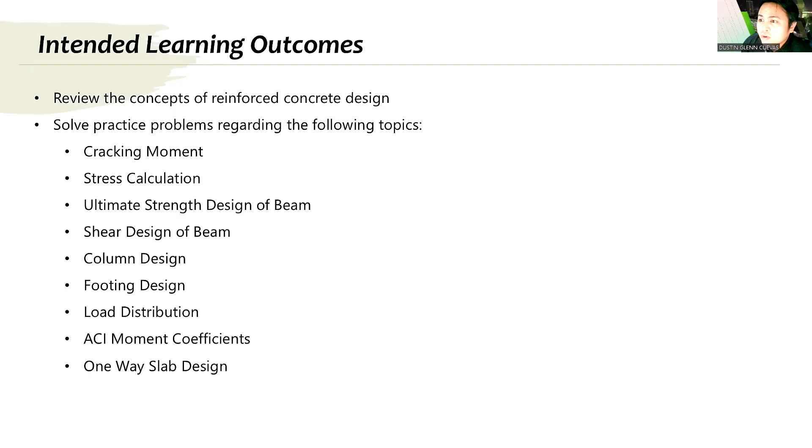Let's start. Our intended learning outcome for today's lecture is to review the concept of reinforced concrete design. For those of you under me in RCD, I actually revised the lecture—this is not my original lecture, this is my review lecture. I'll be a bit faster here, and mostly I'm just focusing on the calculation, not on the concept. I won't be discussing the concept in much detail, unlike in the original RCD lecture.

We are going to solve practice problems on the following topics: cracking moment, stress calculation, then we'll jump directly into Ultimate Strength Design (USD), shear design, column design, footing design. I will also cover load distribution, one-way and two-way. Then we're going to discuss the ACI moment coefficient, where we calculate moments for a continuous girder or continuous slab given the position of the live load—we'll talk about where these coefficients come from. We'll also discuss one-way slab design. I'm not going to discuss two-way slab because that's not usually given in the board exam—it's not commonly given. These are the common topics.

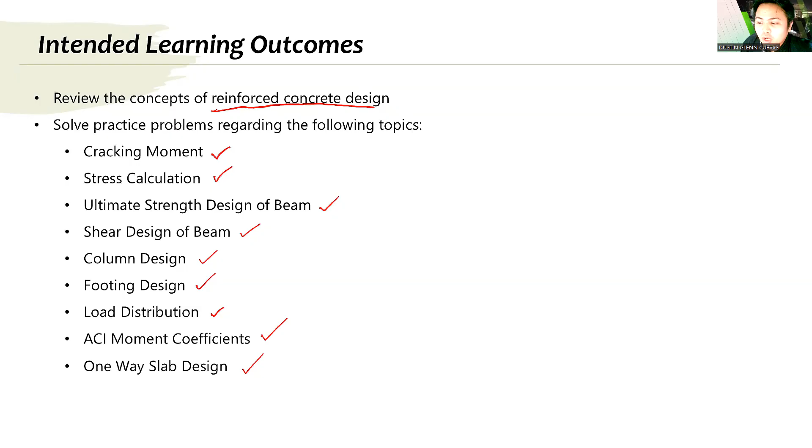Okay, let's start with a simply supported beam. If you have a simply supported beam loaded with a uniform load W, the beam will deflect downward. As you learned in other courses, we know that tension is at the bottom and compression is at the top. That's why we put reinforcement there—our concrete is weak in tension.

We add reinforcement to resist the tension. So when you have a simply supported beam, compression is at the top and tension is at the bottom. Where do we place the reinforcement? At the tension side—we only provide reinforcement at the tension side, because concrete is weak in tension.

There are stages that a beam goes through when we load it with a uniform load. The first is the uncracked stage, where since you haven't loaded it that much yet, the stress distribution is linear. At this point, if your stress in concrete is less than the cracking stress, or the modulus of rupture—this is what we call the cracking stress, or basically the modulus of rupture.

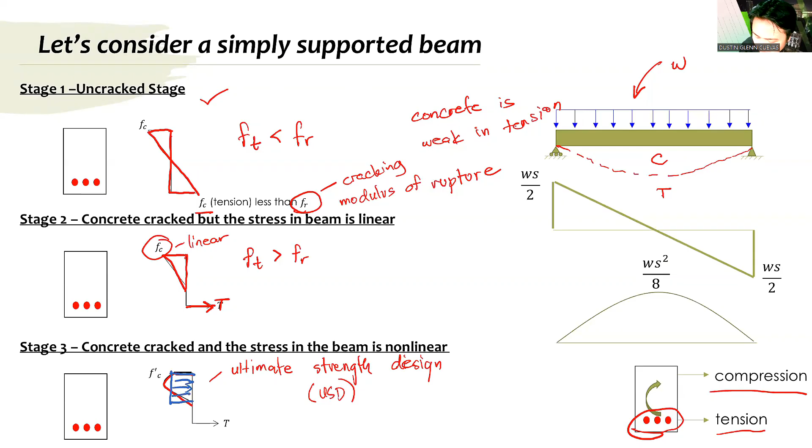What we are doing in USD is we are transforming this nonlinear curve into an equivalent stress block, called Whitney's stress block. And based on this, according to what we learned in RCD, the maximum stress that we consider in this uniform stress block is 0.85 of FC prime, because we are averaging the nonlinear stress distribution. Okay, that is for ultimate strength design.

So first, let's talk about the uncracked stage. In an uncracked stage, we're just going to use a simple formula from strength of materials, that the bending stress is equal to MC over I, or basically in this case, MY over I.

And our modulus of rupture, basically this is the stress before the concrete cracks. This is the stress before the concrete cracks. FR is just the stress before the concrete cracks, that's all.

And according to our code, it is actually FR, which is equal to 0.62 lambda square root of FC prime. Lambda is just the multiplier for lightweight concrete, 0.75 for lightweight, 1.0 for normal weight. So commonly, it's just 1.

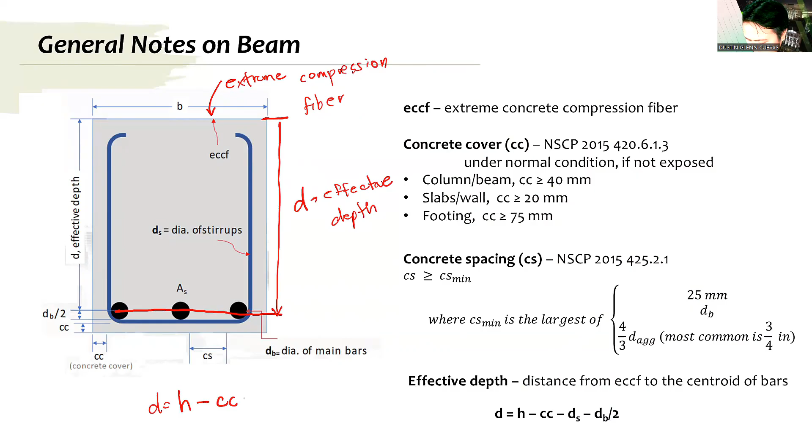So how do we calculate for the effective depth? Basically, the effective depth is just the total height of the beam minus the concrete cover minus the diameter of the stirrups minus the diameter of the bar over 2.

For the concrete cover, according to our NSCP code: for column or beam, the concrete cover should be greater than 40 millimeter. For slab, it should be greater than 20 millimeter. For footing, since footing is exposed in soil, a hazardous surface, the concrete cover should be greater than 75 millimeter.

So the concrete spacing, or the spacing between bars, CS - the clear spacing between bars should be greater than the minimum concrete spacing. The minimum concrete spacing is 25 mm. It's actually the largest of the following: 25 mm, the diameter of the bar, or 4/3 diameter of the aggregates.

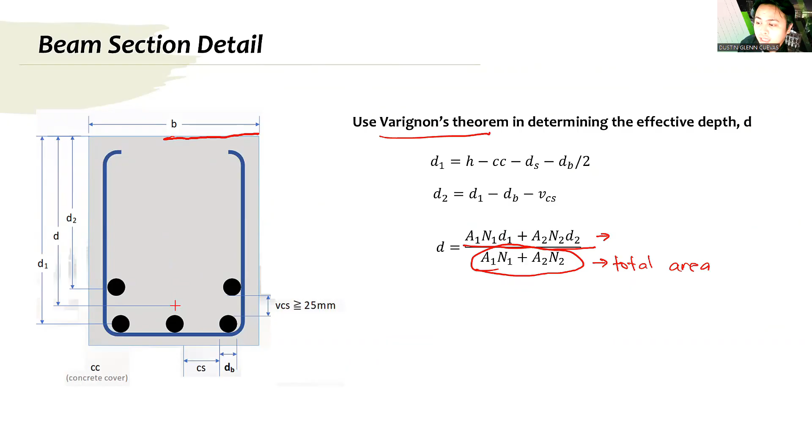Basically, you just take the moment at the top - this is just the total area, and the top part is just the moment of the bars coming from the top. It's just moment, this is just Varignon's theorem.

Okay, so for the principle of working stress design, let's now move on to after the beam cracks - basically when the beam cracks, your tension stress is greater than the modulus of rupture, FR. So when your tension stress is greater than FR, that means the concrete is cracked.

So for the working stress design, you now have a linear stress distribution - concrete is linear, and at the same time, steel is also linear. However, in order to use the formula MC over I to calculate the stress, it is only applicable for a homogeneous element.

So our formula MC over I is only applicable for a homogeneous element. What does homogeneous mean? It means the element is made up of only one material. And since what you are analyzing is now a combination of concrete and steel, MC over I can't be used directly. But we can still use it if we transform the steel into its corresponding concrete area.

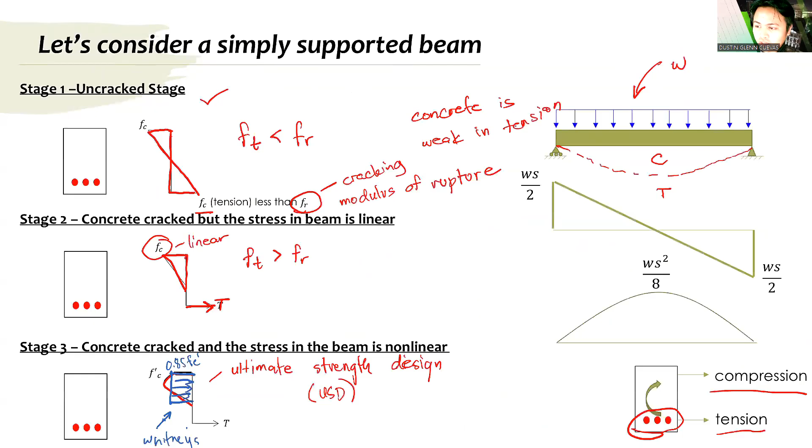Ano po ang allowable stress based on our code? Ang pinag-uusapan pa lang po natin dito ay linear stress distribution under the working stress design, yung sa stage 2. Dito sa concrete, crack but the stress in beam is still linear. Stage 2 pa lang tayo. So what are the maximum elastic stress?

The maximum elastic stress, basically for concrete, is 0.45 of FC prime. For steel, that is around 140 megapascal for grade 280, or for grade 280 bars, and 170 megapascal for grade 420 bars. Or usually ang FS natin, that is just taken as 0.5 of FY.

0.5 of FY. Ano po yung factors na yan? Yung 0.45 saka 0.5, basically those are coming from factor of safety. Kapag working stress design, nagpo-provide tayo ng factor of safety, and that factor of safety is corresponding to 0.45 and 0.5. Binabawasan natin yung maximum stress.

Ang principle ng working stress design ay ginagamit lang natin ang partial ng stress, parang sa steel design. Gumagamit lang tayo ng partial stress. Kaya po minomultiply natin sila ng 0.45 or 0.5 because we are only getting a partial of the stress. We are not maximizing the stress. Ang nagma-maximize ng stress ay ultimate strength design. Again, ang nagma-maximize ng stress ay ultimate strength design.

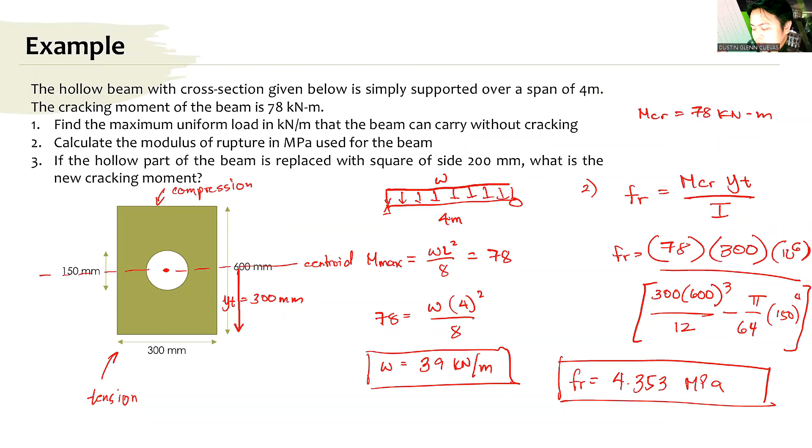Kasi kahit ano pang shape ng concrete, ang FR natin according to NSCP 2015 is just 0.62 lambda square root of FC prime. So basically the modulus of rupture is dependent on the FC prime. So kapag hindi mo binago yung FC prime, hindi magbabago si modulus of rupture.

So to answer number 3, basically what you need to do, let me add nyo. Sabi niya po, papalitan daw natin yung ating beam na meron tayong square sa gitna. But the square is now 200 millimeter. So this is still 600 and this is still 300.

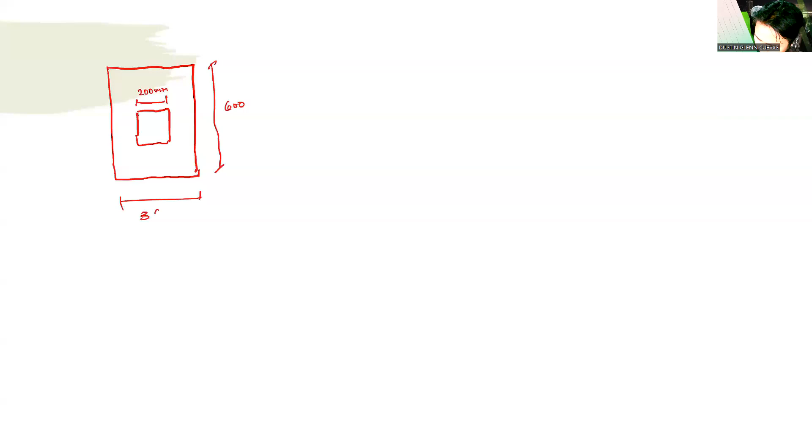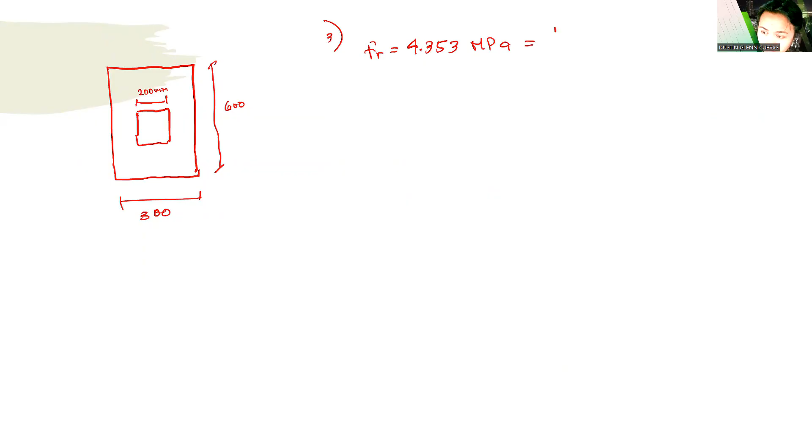So number 3: since hindi mo naman pinalitan yung strength ng concrete, the modulus of rupture will be the same. So FR will still be 4.353 megapascal. FR is 4.353 megapascal, and basically that is equal to MCR YT over I gross.

So 4.353 is equal to the new cracking moment, since we are trying to calculate the new cracking moment, multiplied by 10 raised to 6 para maging Newton millimeter, multiply by YT. Our YT is still 300 mm coming from the centroid going into the extreme tension fiber, 300 millimeter. So that is 300 divided by the gross moment of inertia. That is, it is actually now a square, no? Square na po siya.

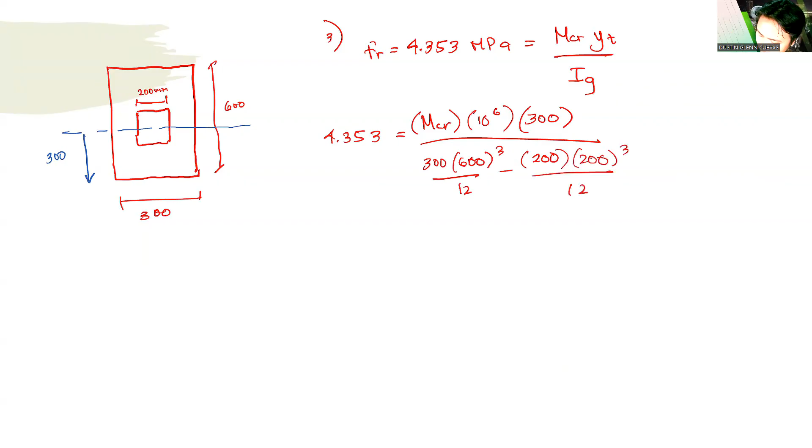So basically base 300 times height cube over 12 minus the square, or basically that is 200 times 200 cube over 12. So ito na po yung ating MCR. Can you calculate for MCR? Just cross multiply, but basically the value of FR will be the same. Parehas lang po yung value ng FR.

So the answer will now be 76.42 kilonewton meter. So coming from 78, it is now 76.42. So far, is that clear? Clear po tayo dito?

Okay, so let's now try to solve this problem. A rectangular beam 300 by 500 reinforced with 3 diameter 28 mm bars, having its centroid 75 mm from the bottom of the beam. Use FC prime 21 megapascal, Fy 275. Calculate the elastic bending stress to sustain dead load moment of 30 and live load of 40 kilonewton meter.

So basically, our beam is this one. Meron po tayong beam dyan. So according to the problem, we have a beam of 300 by 500 mm reinforced with 3 diameter 28 mm bars. And having its centroid 75 mm from the bottom of the beam. So basically, this is 75.

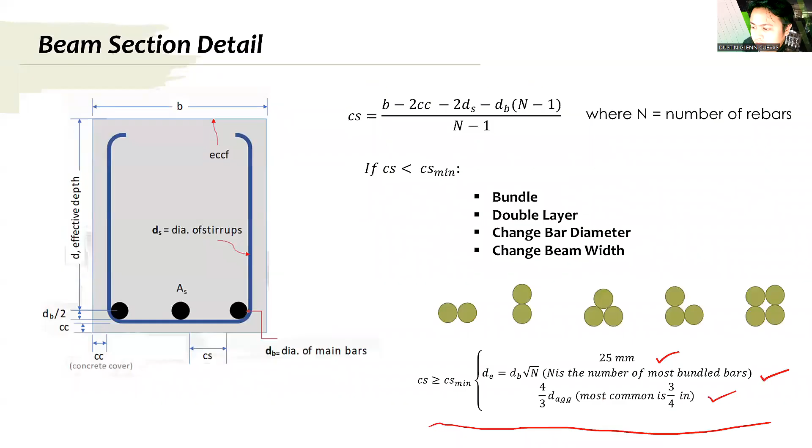So if ayaw nyo mag-assume agad, you can easily calculate for the cracking moment. Pwede naman pong i-calculate yung cracking moment. MCR is just equal to FR IG over YT. So MCR natin, the cracking moment will be equal to, ang FR natin is equal to 0.62, that is a formula given in our code. Usually po, si Ma'am Praxi, the examiner for RCD, kapag FR, hindi niya na binibigay. But lahat naman ng codes binibigay niya when it comes to RCD, pero yung FR, hindi niya na binibigay. Dapat po alam na natin yan. 0.62 square root of FC prime, no?

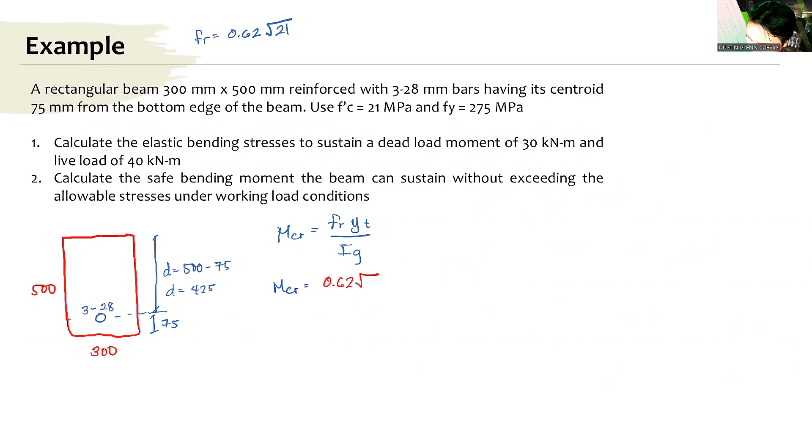So FR is basically 0.62 square root of FC prime. Our FC prime is 21. Can you calculate this FR? Anyway, kahit wala pong value, diretso ko na. So that will be 0.62 square root of FC prime 21 multiplied by YT. YT will be coming from the centroid going to the extreme tension fiber.

Again, hindi mo pa i-consider yung bakal kapag nagka-calculate ka ng cracking moment. Our YT is 250. YT is equal to 250, divided by I gross, that is base times height cube over 12. So what will be our MCR?

Divide it by 10 raised to 6 para maging kilonewton meter. I-divide na lang natin ng 1 over 1,000 squared para maging kilonewton meter. The answer will be? What's the value for cracking moment? .23? Is that correct? Is that correct?

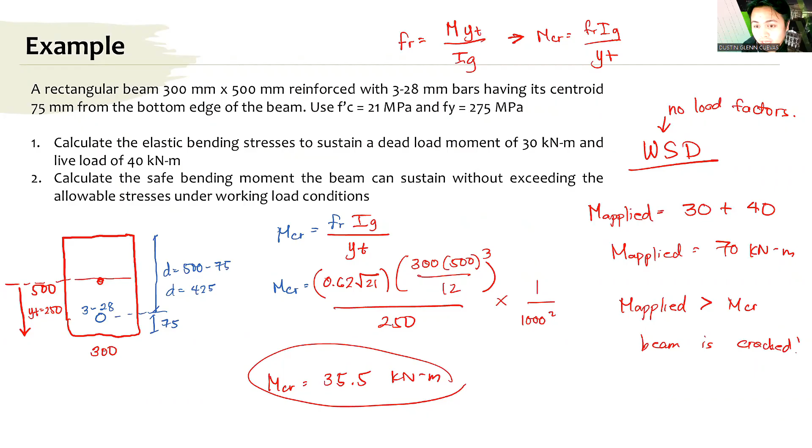Anyway, this step, ito pong ginagawa ko na to, hindi talaga siya part ng calculation. Pinakita ko lang na nag-crack na si beam kapag na-reach niya yung 35.5. Pinakita ko lang na crack na po yung beam. But it's not actually a part of our solution.

So let's go to our solution proper. Basically, ang kailangan niyo lang gawin is if you encounter this type of problem, alam mo na ang pinapakalculate sa'yo is working stress design, linear yung stress. Kasi nga sinabi niya na elastic bending stress, ito na po yung clue mo. So kung pinapakalculate sa'yo yung elastic bending stress, kahit hindi niya sabihin na working stress design ito, alam mo na po na working stress design yung gagamitin mo. Alam mo na hindi mo kailangan mag-apply ng load factors, alam mo na nagagamit ka ng modular ratio because sinabi niya elastic bending stresses. Okay?

So again, you have a beam which is actually 300 by 500, and you have a reinforcement at the bottom. The reinforcement at the bottom is 3 diameter 28. The effective depth is 425.

So since nag-crack na po yung beam natin, magbabago na po yung neutral axis natin or yung centroid. This is now your neutral axis. That is your neutral axis. And anything below the neutral axis is now considered as crack. Lahat po ito considered as cracked. Ibig sabihin po kapag crack, ineffective, hindi na siya kasama sa calculation. So kapag crack na po yung ilalim, when your moment is greater than the cracking moment, ineffective na yung ilalim. We are not going to consider that in our calculation. So we are actually locating a new depth of the neutral axis, which is x.

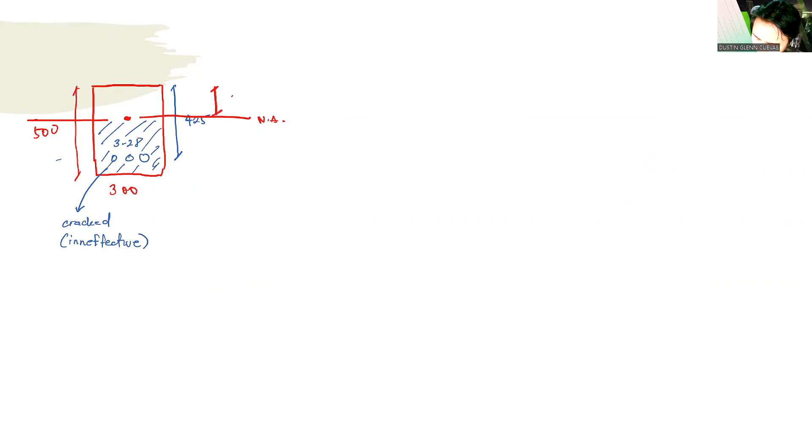Hinahanap mo yung depth ng neutral axis. So to locate the depth of the neutral axis, i-equate po natin yung area. But before we equate the area, para magamit natin yung formula na MC over I,

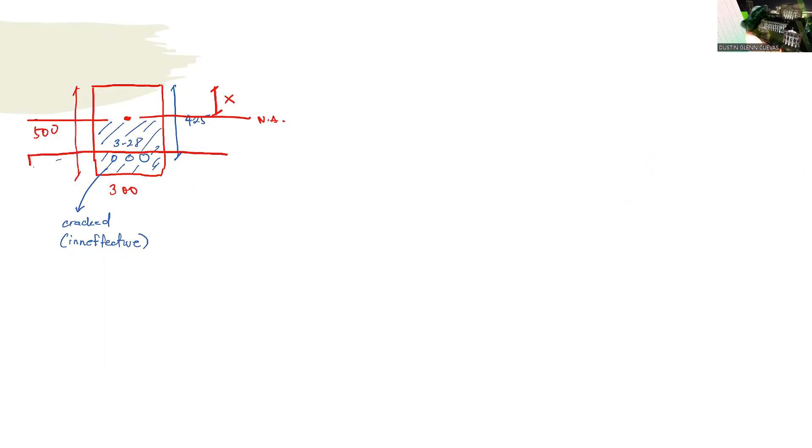kailangan natin i-transform yung bakal into its equivalent concrete area. Ita-transform natin into its equivalent concrete area. So ang gagawin natin, i-multiply natin ang tinatawag na modular ratio. I-multiply natin 'yan, so lalaki yung area ng bakal, and the area of the bars will now be considered as N multiplied by AS. And your N is given as ES over EC,

which is ES is 200,000 megapascal divided by EC, which is 4,700 square root of FC prime. FC prime is 21. So what's the value of 200,000 divided by 4,700 square root of 21? 9.29, and since hindi tayo nagko-consider ng decimal, this is just rounded up or rounded down to 9, nearest whole number 9.

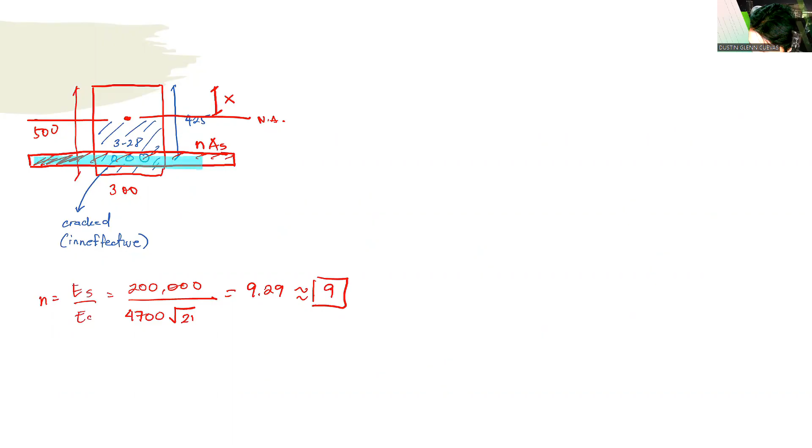So what we are going to do is to transform the area of steel into its equivalent concrete area. So magiging concrete na po ito. So itong kukulayan ko, this one, this will now be concrete. So yung bakal mo naging concrete.

And then in order to locate the neutral axis, we are going to equate the area top. Area top is equal to area bottom. Equate mo lang sa area top equals area bottom. Ang area top is basically the area of the concrete on top, that is 300 multiplied by x.

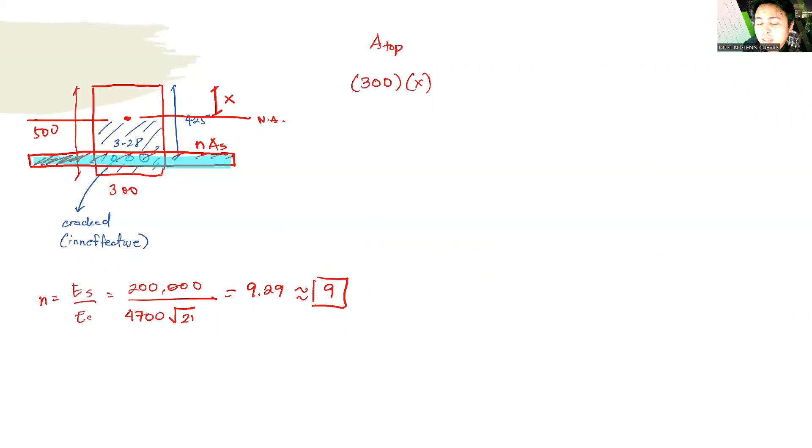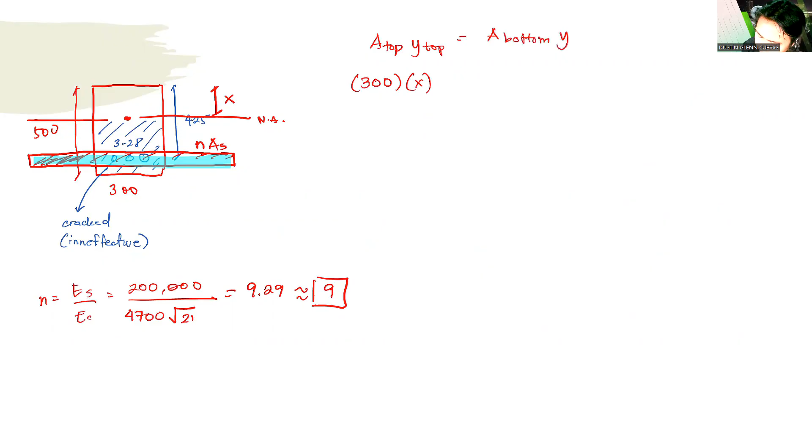Imo-moment natin si area top, imo-moment natin kay neutral axis. So kulang yung sinulat ko, that is supposed to be the area top, imo-moment natin sa neutral axis. Actually ang ginagawa lang po natin Varignon's theorem. So the moment of area at the top, area top multiplied by y bar, y top is equal to area bottom multiplied by y bottom.

Area top multiplied by y top is equal to area bottom multiplied by y bottom. So this is actually the area. Ito na yung area natin ng top, 300 multiplied by x. Kasi nga, 300 lang po ito. So, multiply natin ang distance from the neutral axis. The distance from the neutral axis is x over 2. So, 300 times x, that is the area, multiplied by the distance of the centroid to the neutral axis, that is x over 2.

Next, equals, wala na pong area sa top, yan lang. Area bottom. The area at the bottom is now the transformed area of steel into its equivalent concrete area. So, ang transformed area ng steel is N multiplied by AS multiplied by the distance from the centroid, or the distance from the neutral axis going into the centroid of the bars or the centroid of the transform area is equal to d minus x, or basically 425 minus x. This is d minus x. Kasi ito po effective depth, so that is d minus x multiplied by d minus x.

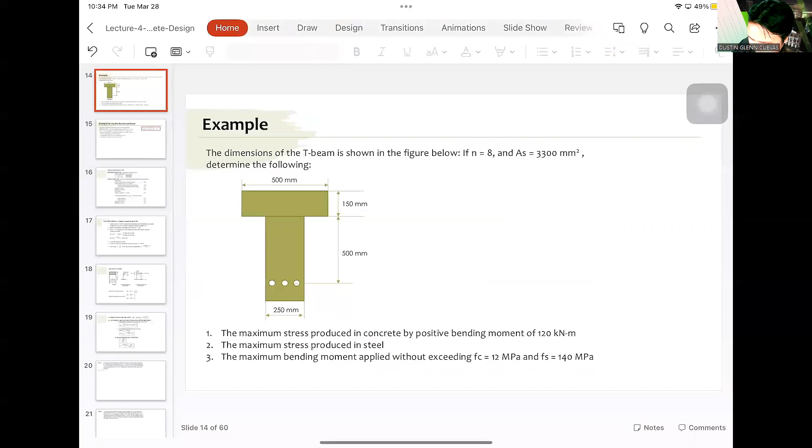So this will now be our beam in consideration. You have only this part and then this one, because the part below the neutral axis, that beam, has already cracked.

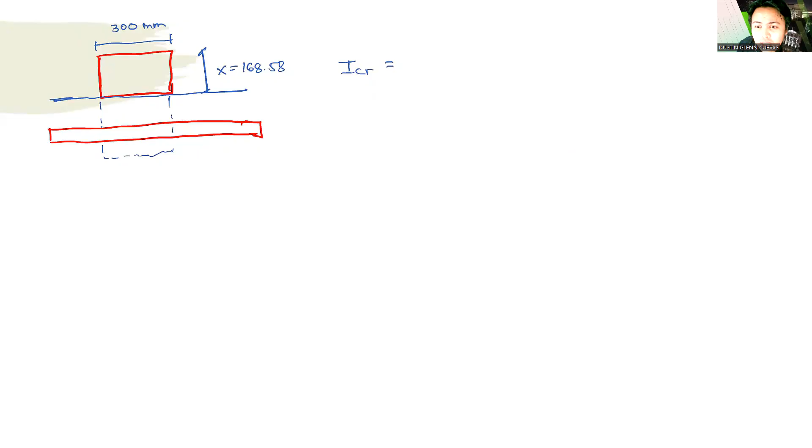Basically, if you still remember the parallel axis theorem from statics, the moment of inertia about the neutral axis is just the summation of the centroidal moment of inertia plus area d squared. If you still remember that: ICR is equal to IX bar plus AD squared.

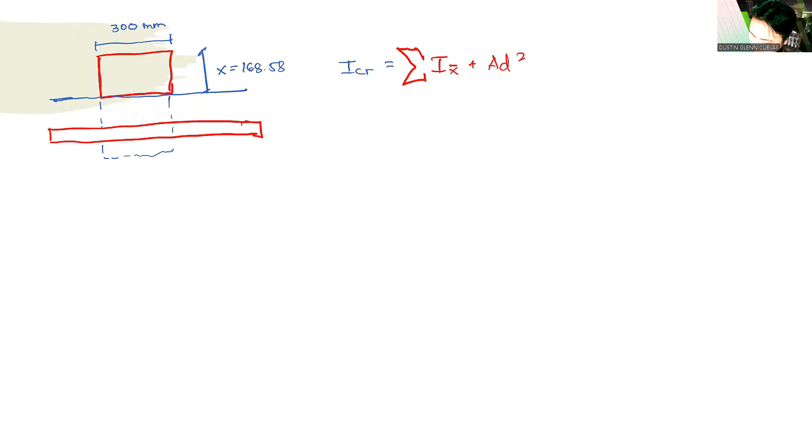So to calculate for the centroidal moment of inertia, the top first. Our top is just a rectangle, so that is BH cubed over 12. Since it's not h anymore, let's make it x, so bx cubed over 12, plus the area which is b times x multiplied by the distance from the centroid to the neutral axis, that is x over 2 squared. This is for the top.

This is the IX bar, then this is the area d squared for the top. Now for the area at the bottom, plus area bottom, this is our area bottom.

Basically, the area at the bottom is composed of a very long strip with a very small differential height, because the steel is very thin. So our base is NAS, height is differential height, BH cubed over 12. But because the height of the steel is so small, we don't consider it anymore — it becomes zero.

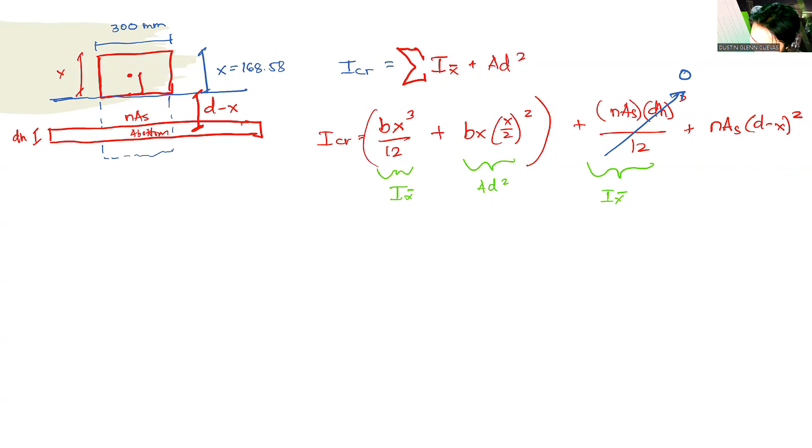So if you simplify this, you get the formula for ICR. Some people memorize this formula, but I don't suggest memorizing it, because this is only applicable for rectangular sections. The problem is, when given a different shape, since they don't understand the concept and only memorized the formula, they won't know how to proceed. Simplified, this becomes bx cubed over 3 plus NAS(D minus X) squared — but take note, this is only applicable for rectangular sections.

When it's not rectangular anymore, we use the concept — apply the parallel axis theorem, since we already know how to calculate moment of inertia.

So calculating for ICR now: it's 300 multiplied by X, our X is 168.58, cubed over 3, plus N, which is 9, times AS — what is our AS? That is 3 pi over 4, times 28 squared, times D, which is 425 minus X (168.58), squared. What is our ICR?

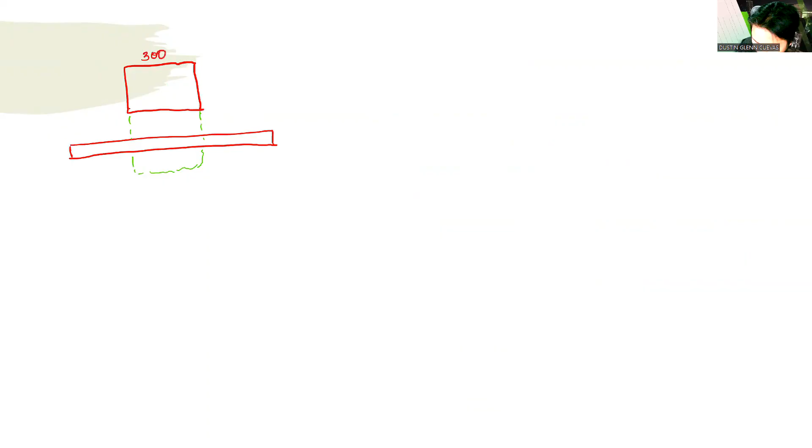So let's calculate now the stresses. This is our beam, already cracked. We have this: 300, and now 168.58, this is 425. So to calculate for the stress, first let's calculate the stress in concrete.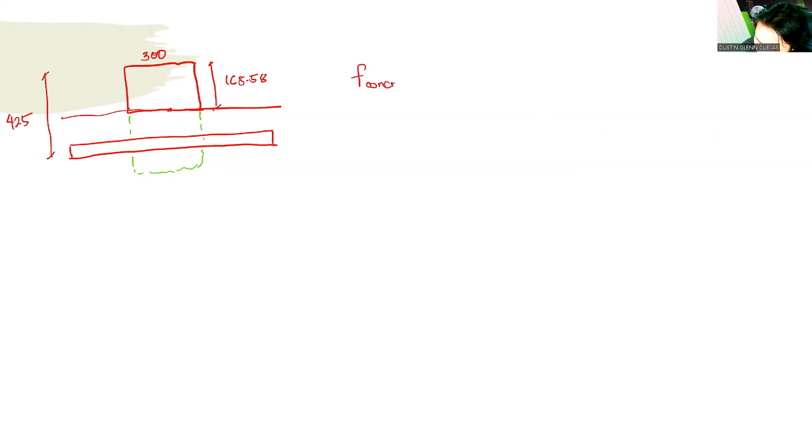Stress in concrete is basically equal to MC over I. What is our extreme concrete fiber? Where is it located? The extreme concrete fiber, coming from the neutral axis going to the extreme concrete fiber, that is basically our distance X, 168.58, because our extreme compression fiber is at the top. This is the extreme compression fiber, ECF.

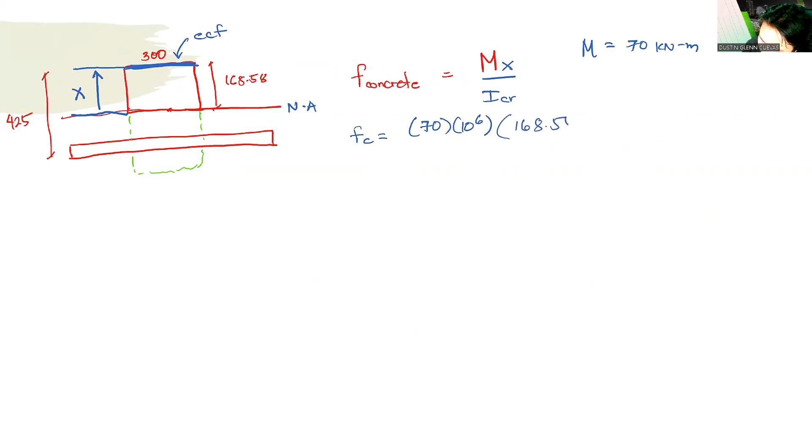So to calculate the stress in concrete, that is MX divided by I — the I you'll use is ICR, the cracked moment of inertia we calculated. So FC will now be the applied moment — take note, we almost forgot — the applied moment that we have is 70 kilonewton-meter, so 70 times 10 raised to 6 to make it Newton-millimeter, times our X, 168.58, divided by the cracked moment of inertia.

The cracked moment of inertia, which is 1,572,225,395. So evaluating this, the stress in your concrete is actually 7.506

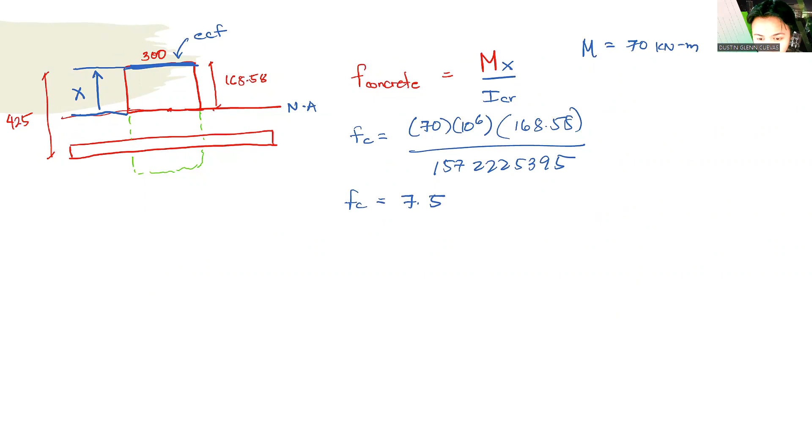megapascal. And then if I want to calculate for the stress in steel, this one is the stress in steel. This is our steel, NAS. Our steel is still down there, hiding as an equivalent concrete area.

So our F steel, Fs, is now equal to the moment times the distance from the neutral axis going into the steel, which is d minus x. This is actually d minus x, multiplied by d minus x, divided by ICR.

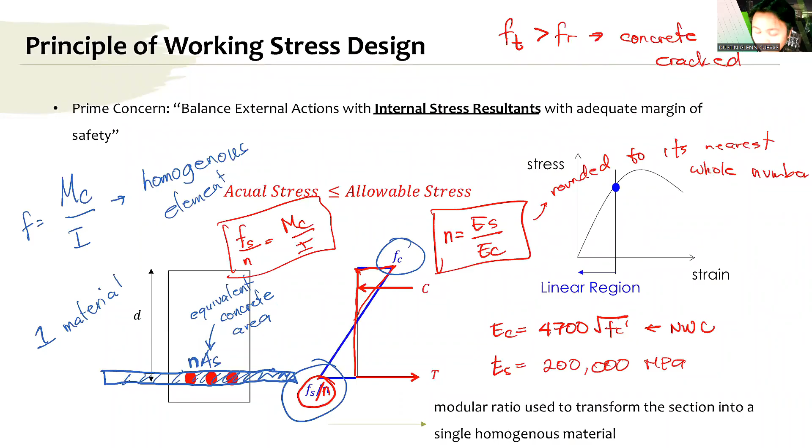However, as I mentioned earlier, when we do the linear stress diagram, what we calculate is not the stress in steel directly. What we calculate is Fs over N. So I will rewrite this with a divisor of N. So to calculate for the steel, our F steel will now be equal to the modular ratio. Let's cross-multiply.

M times d minus x over ICR. And that is equal to the modular ratio, 9, multiplied by the moment, which is 70 times 10 raised to 6. Effective depth is 425 minus x, 168.58, divided by ICR, which is 1,572,225,395. So the F steel is now equal to d minus x, that is 425 minus 168.

Is this correct? 102.75. Is that correct?

Okay, so that is how you calculate for the stresses. This is our stress in concrete and in steel. These are our stresses in concrete and steel. Stress in concrete is 7.5, stress in steel is 102.

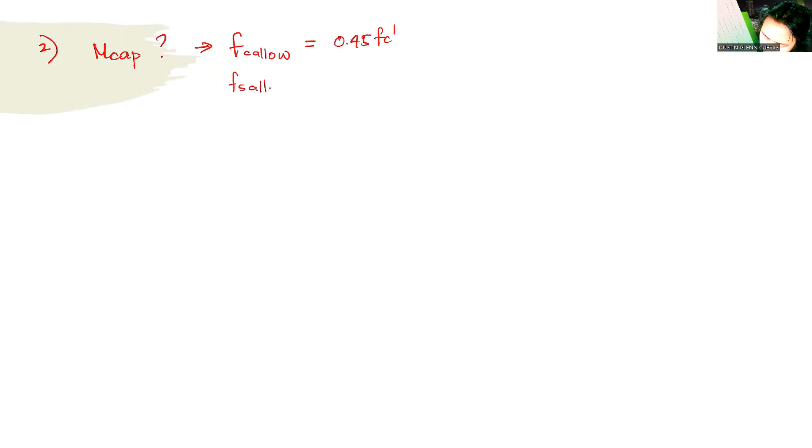What's actually being asked is the second question: what is the moment capacity without exceeding the allowable stress? Your allowable stress, Fc allowable, the allowable stress in concrete, is 0.45 of Fc prime. For steel, Fs allow or Fs allowable, that is 0.5 of Fy. So we will use this to calculate for the moment capacity.

So let's consider the concrete first. Consider concrete: concrete is 0.45 of Fc prime. What is our Fc prime? 21? Yeah, 21 over 275. So 0.45 of 21,

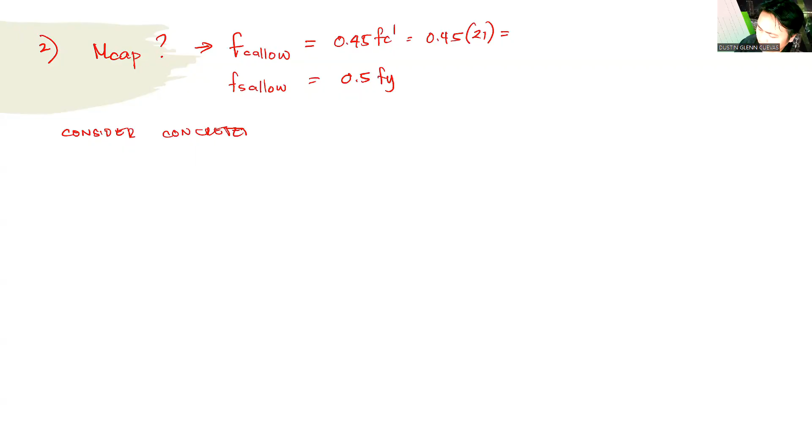don't worry about that, just use 0.45. And for this one, 0.5 of Fy, 275. So let's use concrete first. Consider concrete: our Fc allowable, when you use the allowable stress, it will give you the moment capacity. Please remember that. When you use allowable stress, it gives you the moment capacity in terms of working stress design.

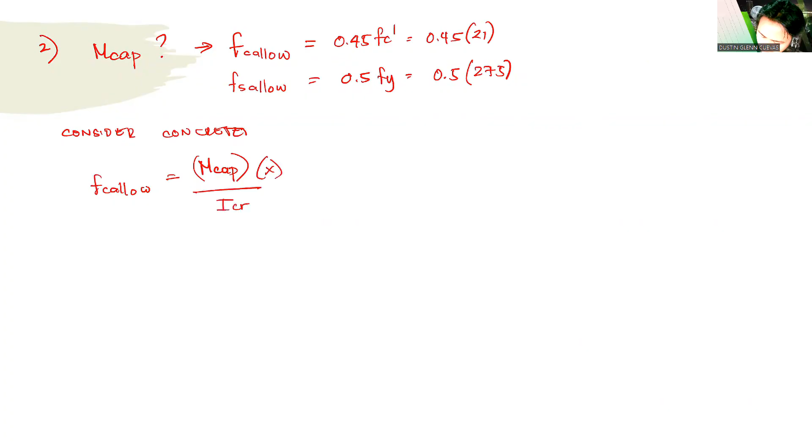Again, when you use allowable stress, it gives you the moment capacity in terms of working stress design. MC over I once again. MX divided by ICR. So our FC allowable, that is only 0.45 of 21, is equal to moment capacity, MCAP, multiplied by 10 raised to 6 so we get kilonewton meter. Our X is equal to 168.58, divided by ICR, our ICR is 1,572,225,395. We get the moment capacity in terms of concrete, that is 88.13.

However, we are still not done because we still have the steel to consider. We need to consider the steel as well. Consider steel.

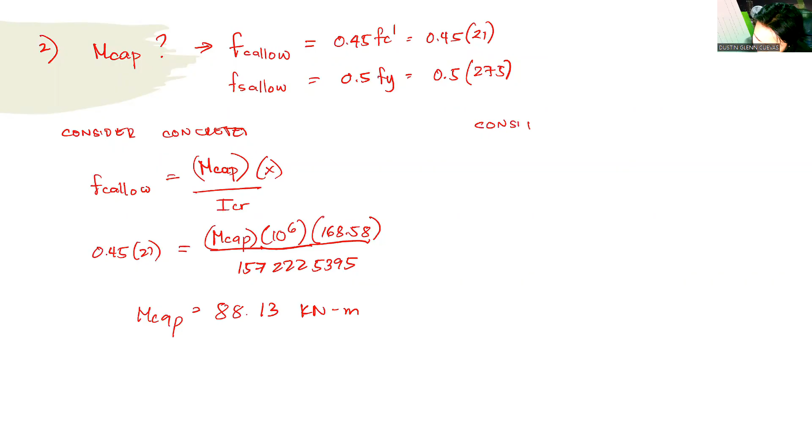Consider steel. However, when considering the steel, there should be a divisor of modular ratio. So Fs allowable divided by N, don't forget the divided by N, is equal to moment capacity, MCAP, times d minus x. For steel, we use d minus x, divided by ICR. So Fs allowable will now be 0.5 of 275 divided by N, which is equal to modular ratio, which is 9, times the moment capacity, which is what we are solving, times 10 raised to 6, times d minus x, that is 168, effective depth 425, minus 168.58, divided by ICR. What is our moment capacity?

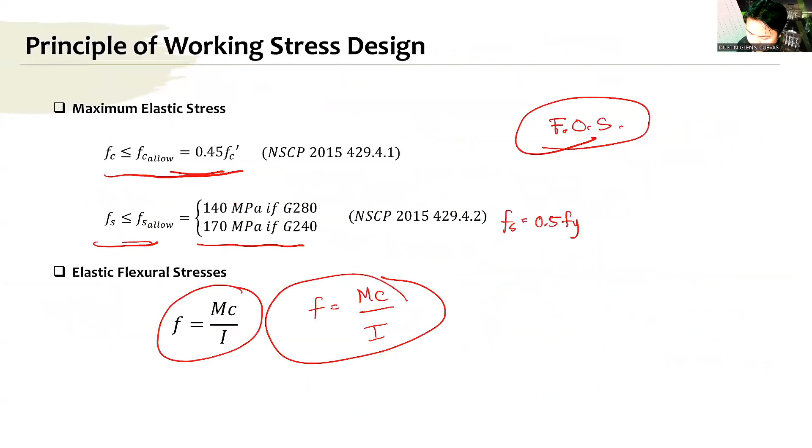Okay, let's try this one. So for this example, this is not a rectangular section. So again, be careful when using this formula, Bx cubed over 3 plus N A S times D minus x squared. That is only applicable for rectangular sections. Minsan, ang ginagawa ng mga nagre-review, kinakabisado yan. That formula has limitations, and that limitation is only for rectangular.

So dito tayo sa T-beam. If the dimension of the T-beam is shown in the figure, if n is 8, meron na tayong AS is 3,300. Determine the following: the maximum stress produced in concrete by positive bending moment of 120 kilonewton meter. So hindi ko na i-calculate yung cracking moment, sigurado na tayong nag-crack dito. So we just want to find asan kaya yung X, we just want to locate the location of X.

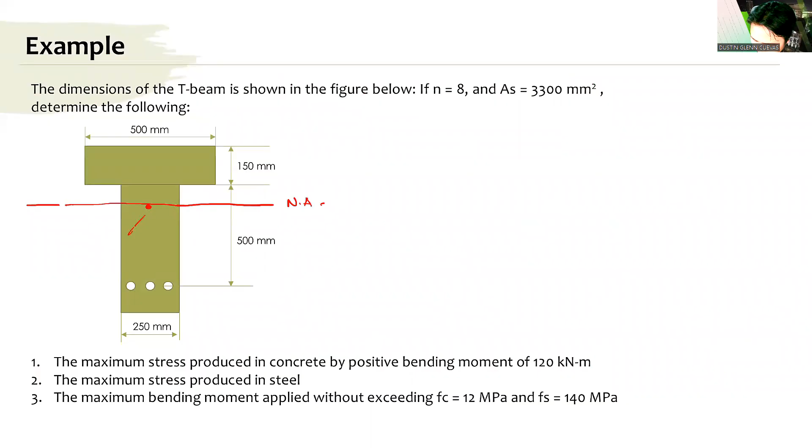So mag-a-assume muna ako, let's say i-assume ko muna na this is my neutral axis. So basically lahat ng concrete below the neutral axis, it will now be cracked, magka-crack na ito, so hindi na siya kasama sa calculation. Okay, so ang gagawin ko, this will now be X. Hinahanap natin ngayon yung distance ng X, what is the distance X?

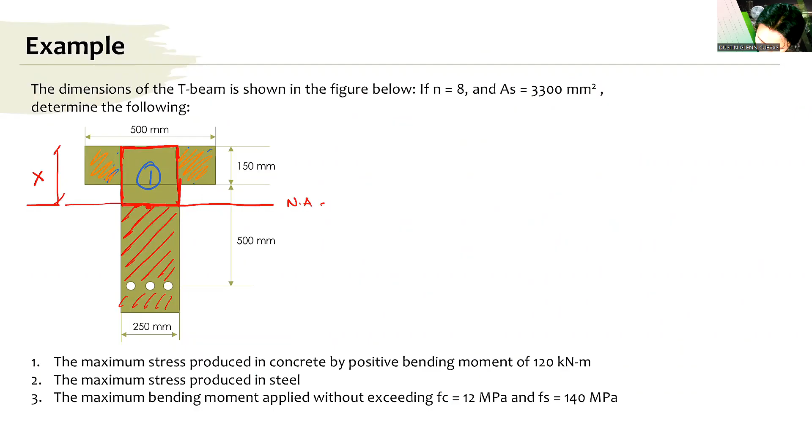Pinakamagandang division na gagawin dito, ang gawin niyo po, usually sa T-beam, ganito ang magandang division: hatiin niyo siya into a rectangular and overhanging part. So hatiin mo siya ng ganito. This is area 1, and the remaining part, yung color orange, that is now area 2. Pagsamahin mo na, wag mo nang pag-iwalayan. I-drawing ko po ulit, this part right here, this will now be area 2, magkasama, area 2.

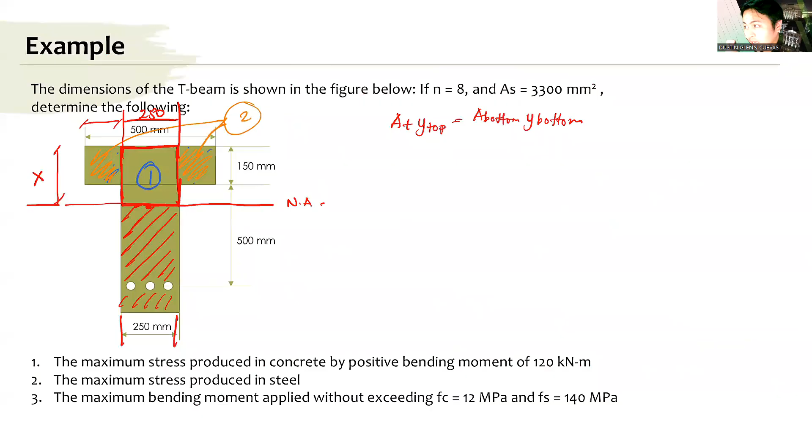Okay, mas madali mag-analyze kapag ganyan yung paghati niyo kapag T-beam. So again, the first thing to do, solve for X. What is the value of X? Para makuha yung value ng X, equate natin, Varignon's theorem, area top times Y top is equal to area bottom times Y bottom. Area top muna, that will be the width of this, basically 250 as shown at the bottom, so 250 lang yan. Yung natitira, kung 500 po, ang natitira din dito 250, so yung natitira is 500 minus 250. The width of the remaining overhanging flange is 250 din, kasi 500 minus 250 di ba, so ang width nung natitira is 250 din, yung natitirang width.

Area top muna tayo, area top, that is equal to 250 multiplied by X.

Area 1 muna yan, multiply by X over 2 plus yung overhanging, yung natira. So that will be, mas maganda po ito, gawin nyo na lang 500 minus 250 or basically 250 din, no? The width of the overhanging flange multiplied by the thickness 150 multiplied by X minus 150 over 2. Paano nangyari yon? Kasi di ba ang distance niyan is ito yon. This is basically 150 over 2. And this is x. So the distance right here is x minus 150 over 2. The distance from the centroid to the neutral axis is x minus 150 over 2. Equate natin sa ilalim. Area ng ilalim, transform natin to.

Transform lang natin yan. Magiging siyang NAS. Ang N natin is 8. Area natin ng bakal is 3,300. Multiply by the distance. The distance will be effective depth, which is 500 plus 150, minus x. That's it. You can now solve for x. What's the value of x?

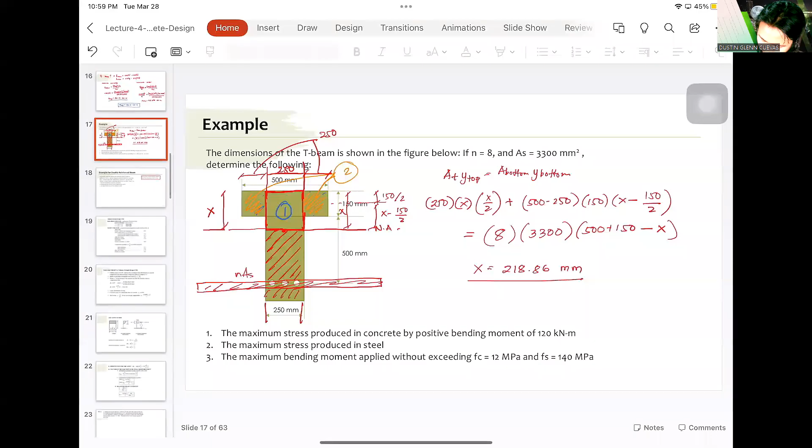So, meron tayong value ng x. We now have to calculate for ICR. Ito, medyo madugo ito, no? Yung pag-calculate ng ICR. So, to calculate for ICR, I will isolate yung T part lang. Isolate ko lang muna yung T part.

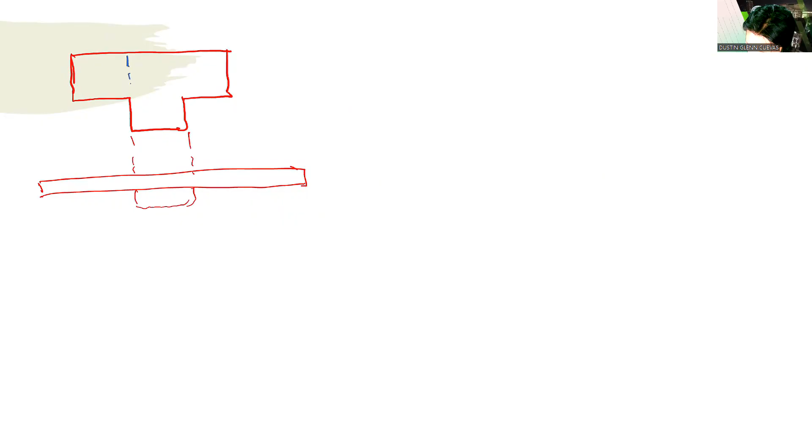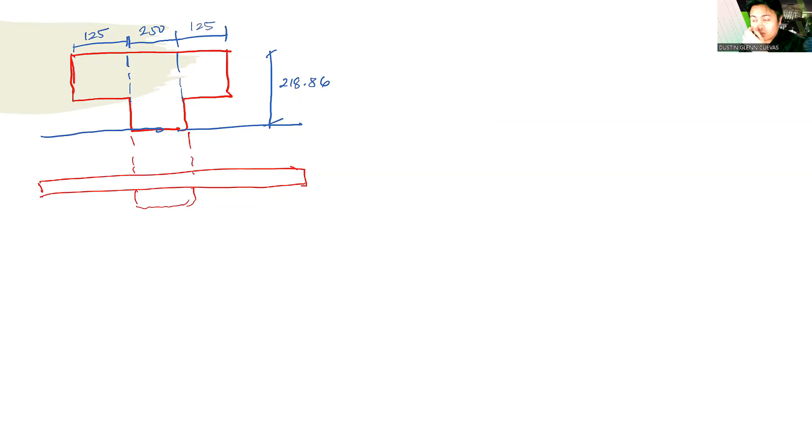Ito, okay. So, assuming meron dyan yan. Ganyan. Okay? So, ang width natin, basically, ganun pa rin po yung division natin. We have area 1 and area 2. The area 1, basically, the value of x is now 218.86. And this is 250. The remaining width is basically 125 sa kabila, or total of 250. So, this is area 1 and this is area 2.

So, paano po mag-calculate ng ICR? ICR will now be area 1 muna. Yung area 1 natin, hindi ko na gagawin yung BH cube plus area D squared. Idediretso ko na po na BX cube over 3. Kapag over 3, take note, I want you to remember this. Kapag po yung kinakalculate mo na moment of inertia is at the centroid, that is BH cube over 12. Kapag ang kinukuha mong moment of inertia naman is at the bottom, kapag rectangle, kinukuha mong moment of inertia with respect to the bottom, that is BH cube over 3.

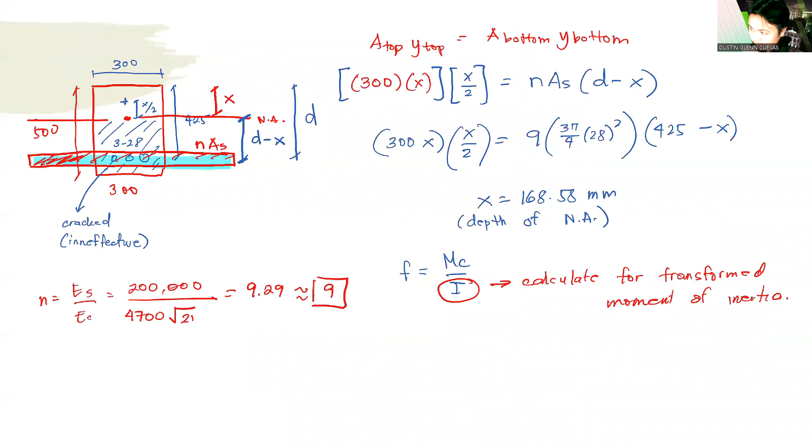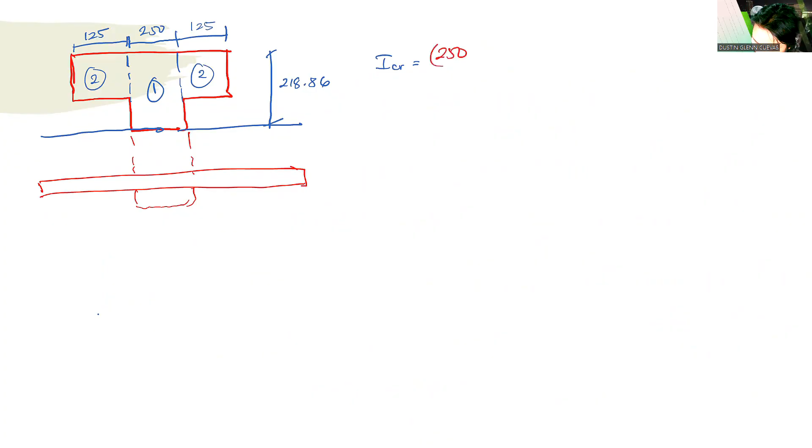Kaya po yung kaninang formula natin naging over 3 kasi with respect to the bottom yung kinukuha natin. Yun dito, no? Kaya po ito naging over 3. That is because we are getting the moment of inertia with respect to the bottom. Okay. So I want you to remember that. So idediretso ko na lang po, ano? Gawin nating BX cube over 3 na agad. BX cube over 3, so that is the base. BH, the height is 218.86 cube over 3. So this is for area 1. Area 1 na po ito, area 1.

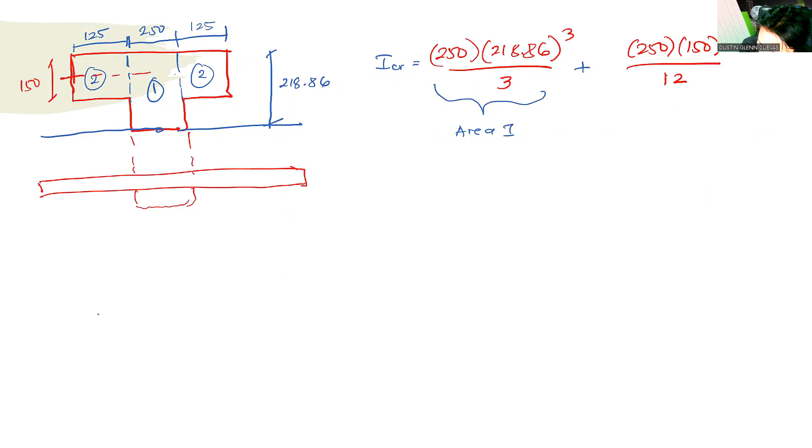For area 2 naman, we need to get the BH cube over 12 and then ita-transfer natin. So plus, for area 2, that will be the base, BH cube over 12. So that is, the base is also 125 plus 125, or basically 250 na lang din. The base is 250. The height is 150. This is 150. BH cube over 12. Kaya lang, kailangan ko pong i-transfer yung moment of inertia. Ita-transfer natin coming from the center, going to the centroid, going to the neutral axis, plus area D squared. Dito na lang sa ilalim.

The area will be 250 multiplied by 150, and distance, that is 218.86 minus 150 over 2 squared, area D squared. Plus, yung ano po natin, yung bakal naman, NAS. Ang N natin, that is 8. Ang AS natin, 3,300. Ang distance coming from the centroid, this one, that is the effective depth. Basically, the effective depth is 650. So this will be 650 minus x, which is 218.86 squared. That will be our ICR. Ano po ang ICR natin?

What is our ICR? Six six two seven two eight eight seven nine two. 6627288792. So that is our ICR.

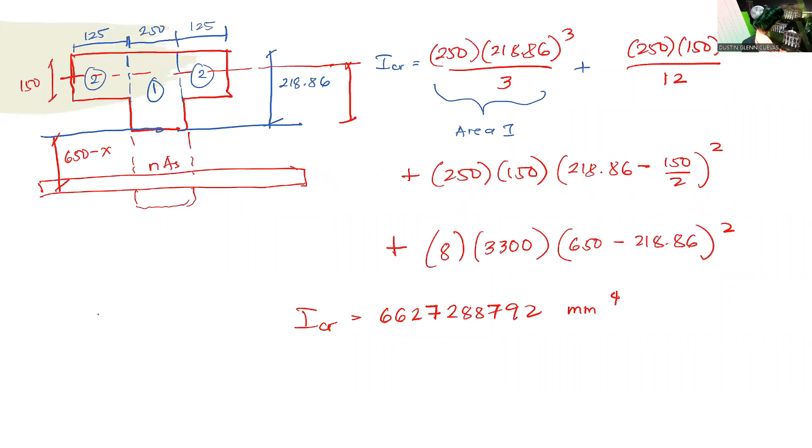Ang X is 218.86. ICR, that is 6627288792. So we can now calculate for FC. 3.96 megapascal.

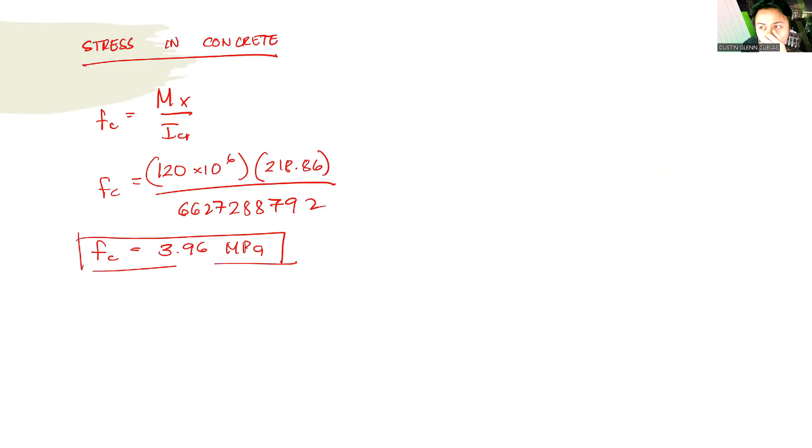And also, kapag po napapansin nyo, kapag yung stress sa concrete mababa, kapag yung stress naman sa steel around 100 plus. Okay? Around 100 plus. So, sana maging palatandaan na po sa inyo yan. Stress in steel naman po.

Stress in steel, how do we calculate for stress in steel? That is Fs divided by N. Huwag kakalimutan yung divided by N na. Fs divided by N is equal to M times D minus X over ICR. So Fs, we want to calculate for Fs, cross multiply tayo to calculate for Fs. That will be N, 8 multiplied by the moment, 120 times 10 raised to 6. Ang effective depth natin, 650 minus X, 218.86, divided by ICR. ICR is 6627288792. So what is Fs?

263.25. Tama po ba to? Is that correct? 263? Mali daw. This is actually 62.45.

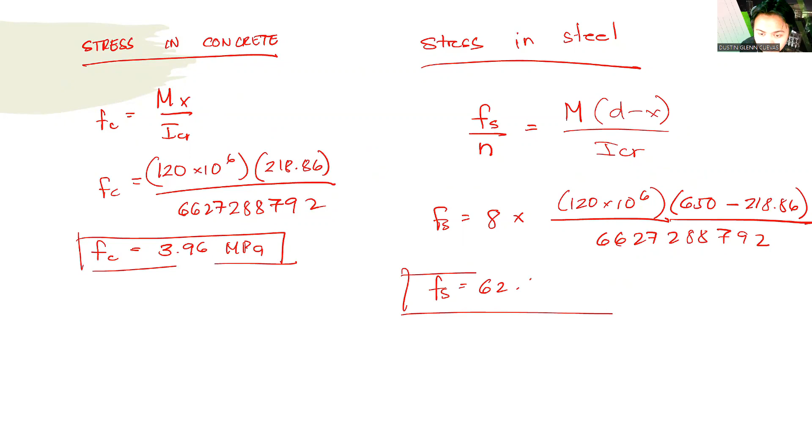Okay. So tinatanong niya rin po, what is the maximum bending moment without exceeding allowable stress of 12 and 140? Again, what is the maximum bending moment without exceeding 12 and 140? So katulad lang din po nung problem 1, ano raw po yung what is basically the moment capacity, no? Number 3, ang tinatanong niya, what is the moment capacity without exceeding FC allowable is equal to 12, FS is 140. FS allow is 140.

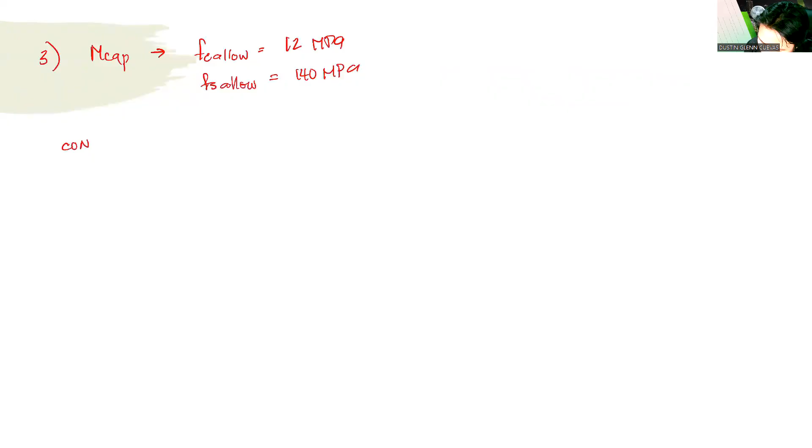So consider ko muna yung concrete, no? Concrete muna tayo. Consider concrete. So for concrete, FC allowable is equal to M cap times X divided by ICR. So that is 12 is equal to M cap times 10 raised to 6 para maging kilonewton meter. Ang X natin is 218.86 divided by 6627, 288792. So what is our M cap?

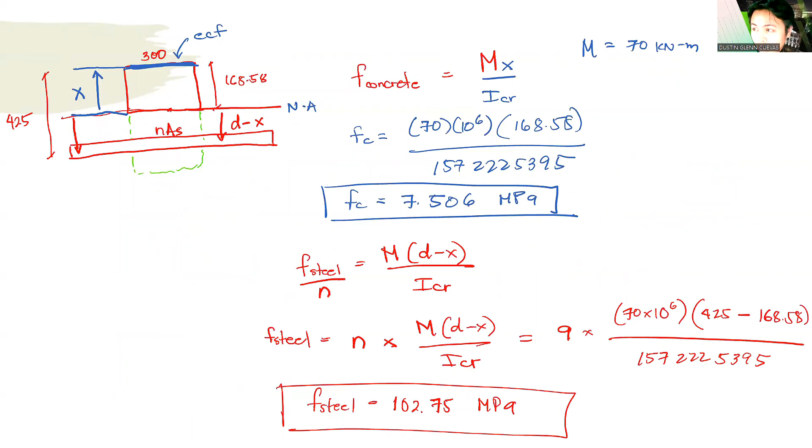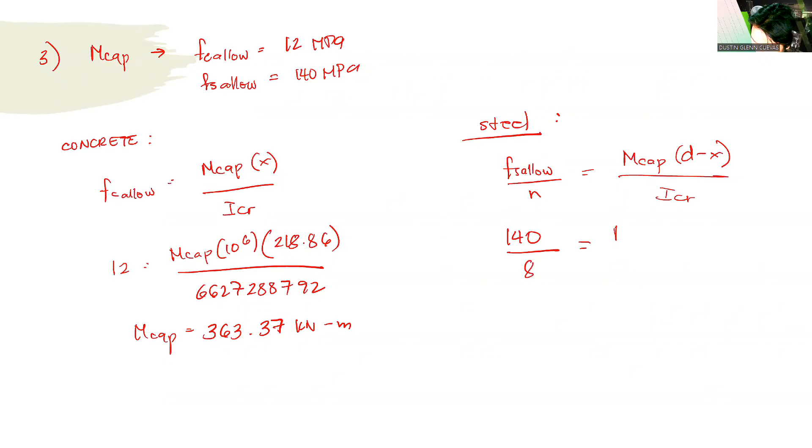So consider naman po si steel. That will be 140 or basically FS allow divided by N. Huwag kakalimutan yung divided by N. M cap D minus X over ICR. So that is 140 divided by X, which is divided by N, which is 8. M cap 10 raised to 6. Effective depth, that is 650 minus 218.86 divided by ICR. ICR is 6627, 288792. So what is our M capacity? 269.

So you have two values. Which one will govern? Ano po mag-govern? Of course, the lower one.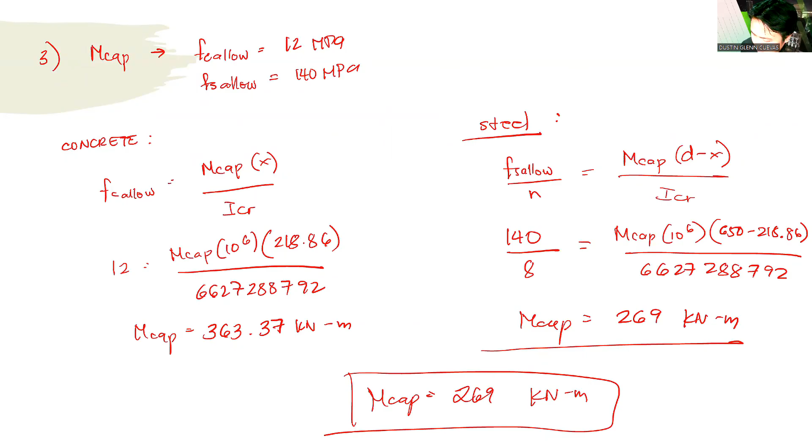Okay. For my last example, I just want to show na kapag po merong compression steel, the modular ratio that we should use is 2N. Ang conversion po kapag ka doubly reinforced na, 2N na siya, hindi na siya N, 2N, no? So let me answer this real quick. Medyo bilisan lang natin, no? So a 300 by 600 mm reinforced concrete beam is reinforced with 4 28 mm diameter tension steel.

So the section is subjected to a bending moment of 150. So ang n daw natin is equal to 9. So again, the first thing to do is to locate x. Hanapin muna natin yung x, yung neutral axis, no? So hanapin natin yung neutral axis, tapos lahat po ng nasa ilalim, basically lahat na nasa ilalim na to, crack. So wala na po yan, no? Hindi yan natin i-consider. So we just need to find the value of x. So again, paano na nga po natin nahanapin yung value ng x?

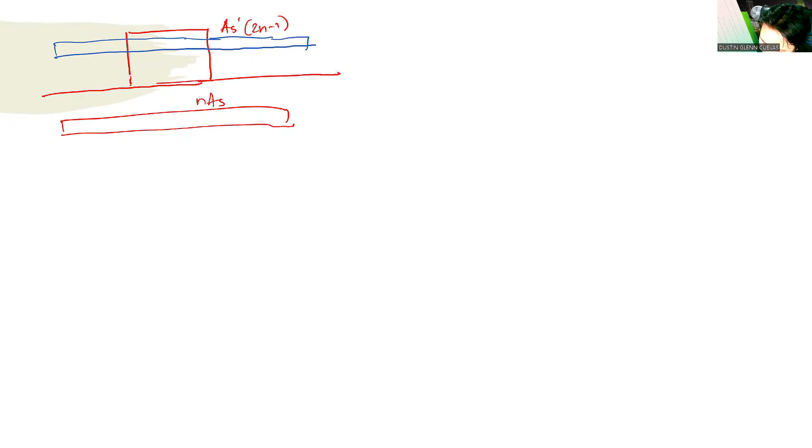And we already calculated for the value of x. The value of x is now equal to 186.15. So calculating for ICR, ICR is equal to, top po muna, area top ulit, area top, that is equal to BH cube over 12. So the base is 300.

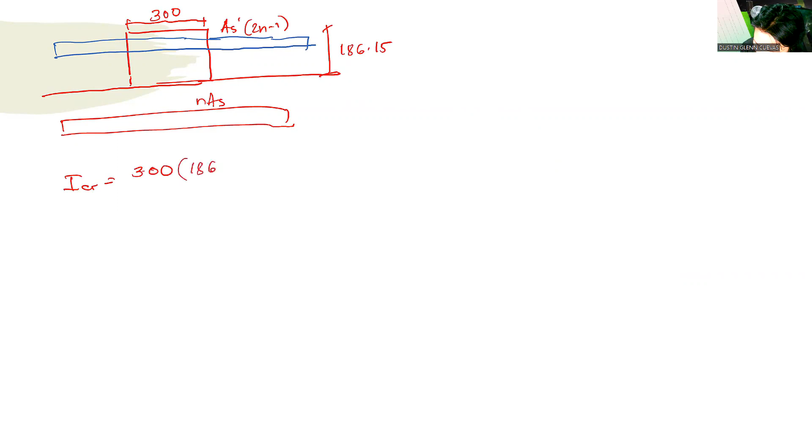X is 186.15. BH cube over 3 pala, over 3, kasi at the bottom na. At the bottom na yun agad. Plus yung ating compression bars, that will be AS prime, 2N minus 1.

Again, may -1 pa rin kasi may butas pa rin yun, so may -1 pa din. Ang distance na will be x minus d prime, it will be x minus d prime quantity squared. Area d squared, area d squared. Okay, plus yung area bottom naman, plus area bottom, NAS, that will be d minus x squared. That's it, no? That will be our ICR.

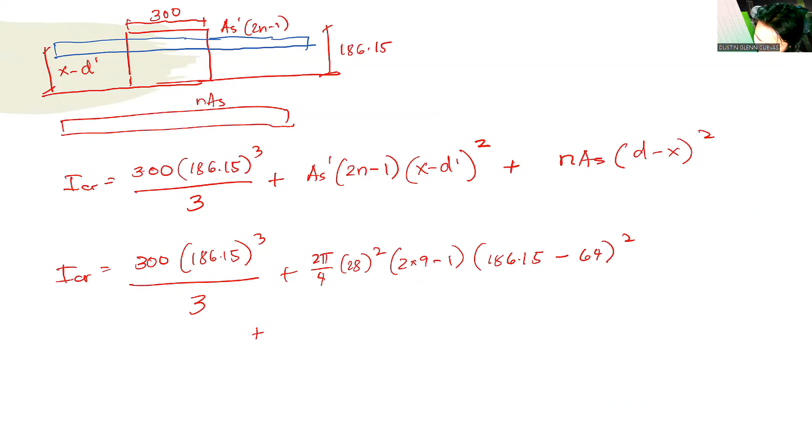ICR is 300, 186.15 cube over 3 plus AS prime, that is 2 pi over 4, 28 squared, 2 times 9 minus 1, x is 186.15 minus d prime is 64 squared, plus yung NAS naman, that is 9, AS is 4 pi over 4, 28 squared, D minus X, that will be 536 minus 186.15 squared. What is our ICR?

367-0555-446. 0555-446.

Okay, so once we've calculated that, we can now calculate for the stresses. First is, what is the maximum stress in concrete?

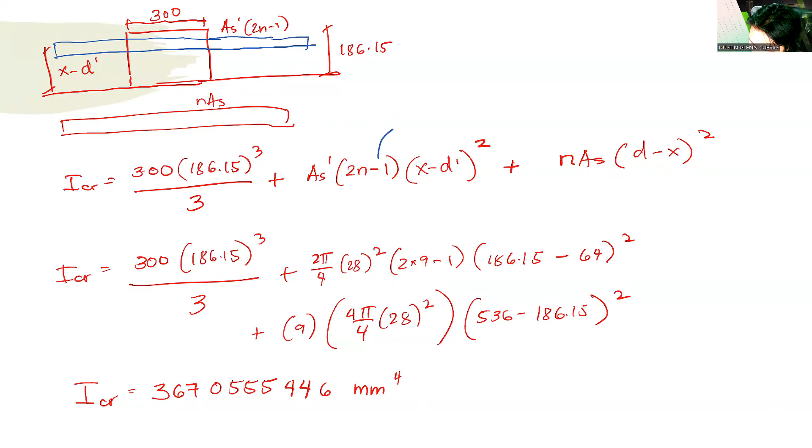Number 1, stress in concrete. Basically, for calculating X, we subtract the area of compression steel. We subtracted it here too because we have a -1. The -1 is the reduction due to the holes. We have a -1 there too.

So first, going back here, stress in concrete, FC is equal to Mx over ICR. Our applied moment is 150. So 150 multiplied by x, our x is 186.15, divided by ICR. ICR is 3,670,555,446. Times 10 raised to 6, to make it megapascal. So FC is 7.61.

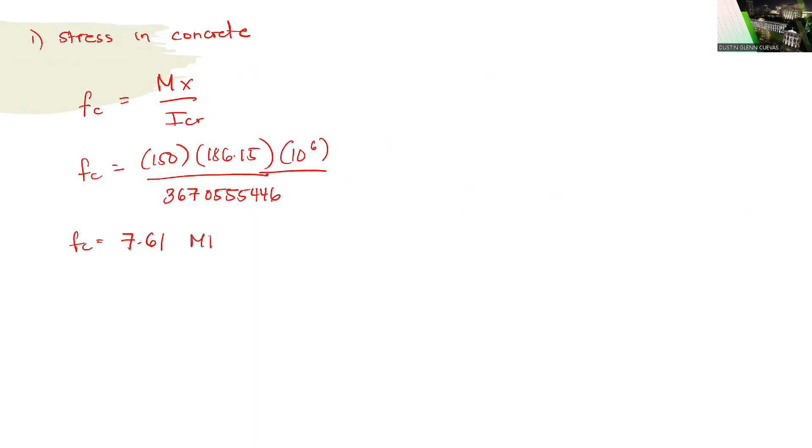Number 2, stress in compression steel. Basically, since we are talking about steel, we need a divisor, which is the modular ratio. But for compression steel, it's not N, according to our code it's supposed to be 2N. So the divisor is Fs prime divided by 2N equals M.

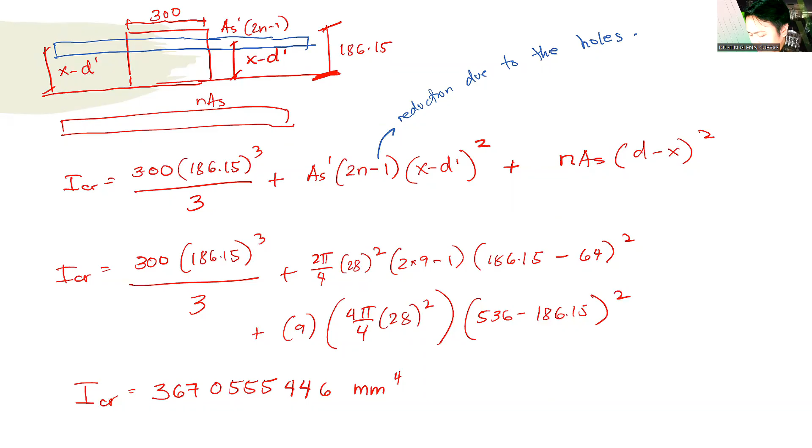What is the distance from the neutral axis to the centroid of the compression bars? That is X minus D prime, divided by ICR. So to calculate for Fs prime, our multiplier is 2N, 2 times 9 multiplied by M, which is 150 times 10 raised to 6.

X, which is 186.15 minus D prime. D prime is 64, divided by ICR. ICR is 3,670,555,446. So what is Fs prime? Is this correct? 89.85.

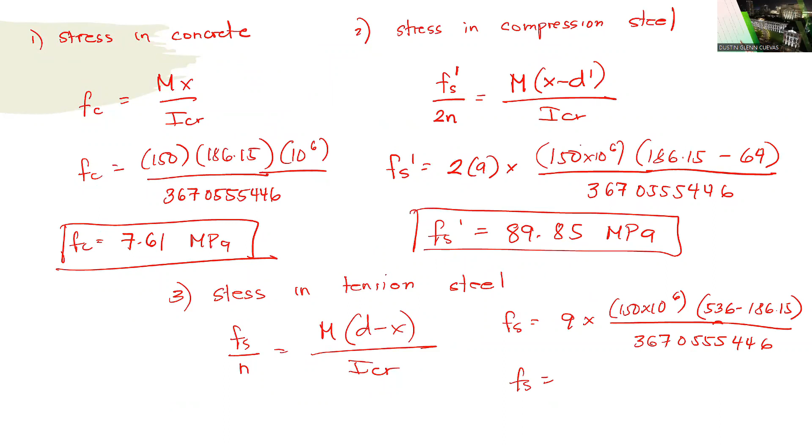And lastly, to calculate for the stress in tension steel, same as before, Fs over N equals M. This one is D minus X over ICR. So Fs equals N, which is 9, multiplied by M, 150 times 10 raised to 6. Our effective depth is 536 minus 186.15, divided by ICR, 3670555446. So what is Fs? 128.67.

Okay, so that's it. Any question regarding this problem?

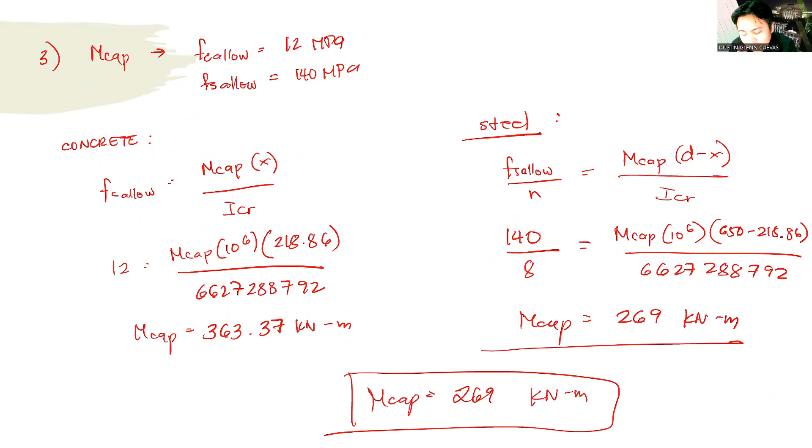Okay, this is actually a very good question. What is the concept behind why sometimes the calculated capacity coming from steel is bigger versus the MCAP calculated from concrete? That's where the under-reinforced and over-reinforced concept comes in.

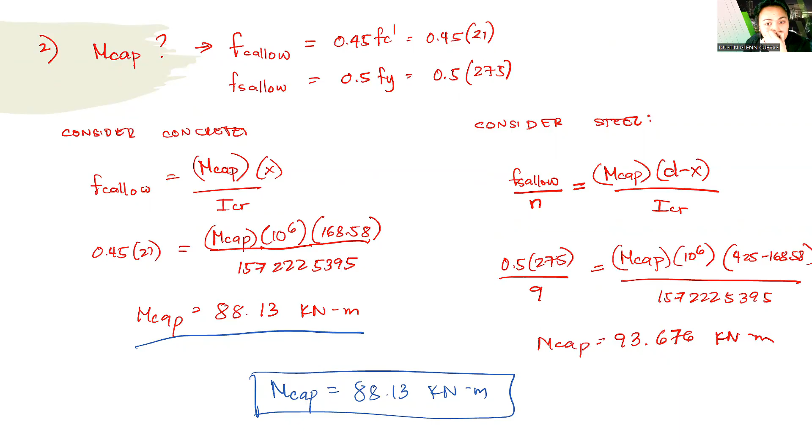So actually, I will stop here. I don't want to go directly into ultimate strength design because we'll become night owls. So I will stop here. Ultimate strength will be on part 2. Okay? So this is part 1 for now.